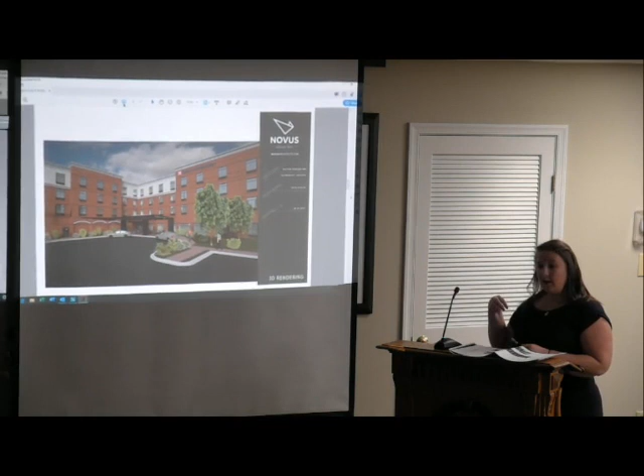Do you have any more of the elevations, or is that the only elevation? Oh, yes, we do have other views. So this would be on the parking side. Lights off as we go through them, sorry. Okay. This elevation here would be from the parking lot side, at the drop-off area, and the vestibule here. Again, the goal is to make that as attractive as the outside street-facing elevations.

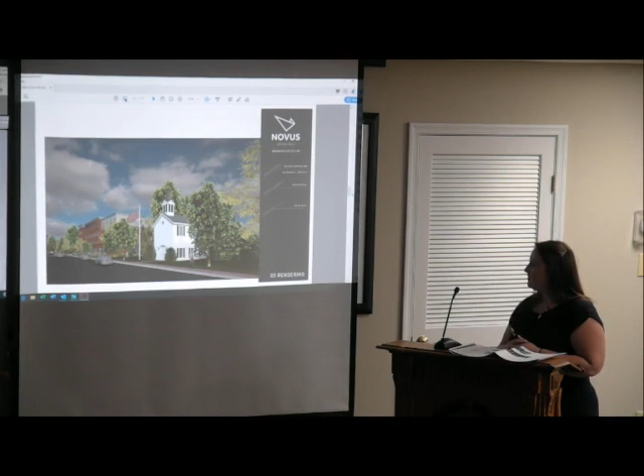This is a view just looking down Washington, with, of course, the museum front and center. And this is highlighting some of the detailing with the soldier coursing here, and then also some of the art window headers. Is the cornice masonry here, or is it?

It's not. We can do either a formed GFRC, formed concrete, or we can do an EIFS material, which I know is not necessarily approved in the ordinance. However, from a distance, it would be colored and detailed to look and read as a true formed concrete cornice.

What about the window, I'm trying to think of the word, it just left me. What's that? Thank you. Are they black? They are currently black. Okay. It just looks a little different than the other blacks, but I'm sure it's just the mock-up. Yeah, I think it's just a material. Sometimes things don't transfer well. And that's pulling in this street front corner and making the whole building really read as cohesive, pulling it all together.

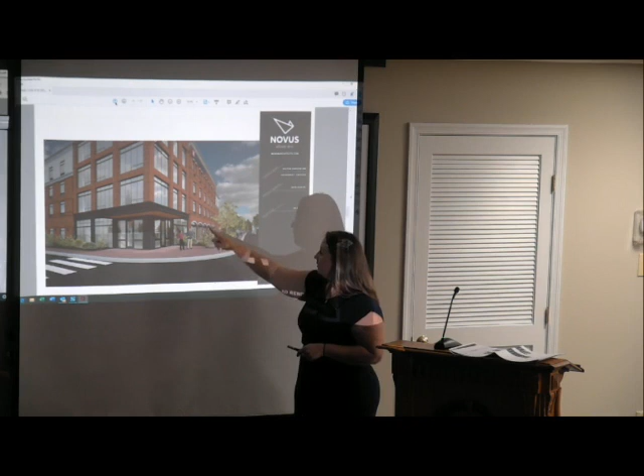And also, I don't see any lighting in the drawings. We do have lighting incorporated, particularly down at the first floor level. This area out here is where our outdoor patio would be for the dining area, and we do have lighting located on each of those. And that's the corner of Jefferson and Washington? Yep, so that would be facing this elevation. And we would repeat that down the side of the building as well.

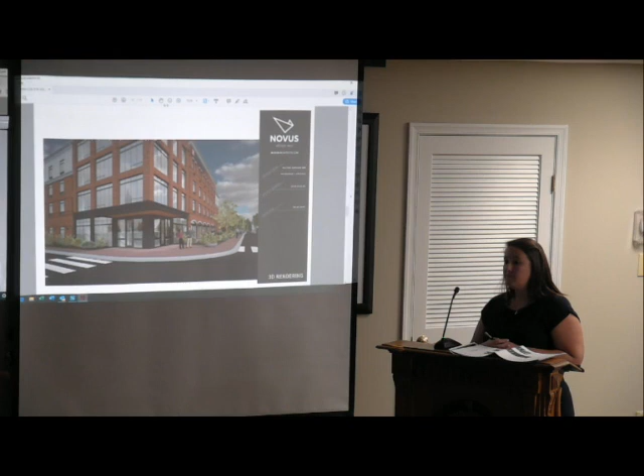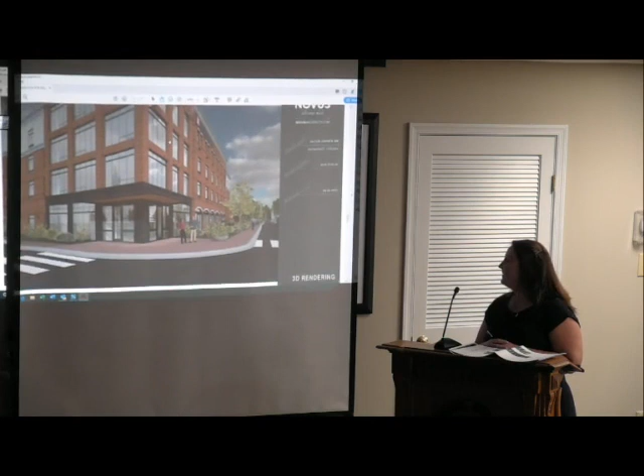They're hard to see. Do you happen to have the specs on the fixtures at all? I do not. We aren't quite there yet, but we'd be happy to submit those. You can see them faintly. I see them, but they kind of fade to the background. Yeah, and it's difficult to see any detail that you might have. Is the brick pretty much flush all around, or do you have any type of? No, it's recessed in and out. So if we go back.

This view is detailing or highlighting some of that, and everywhere there is a soldier course or row up, we either project in or out, so there is some relief in the building. Those are air vents for the HVAC units, and those louvers would be colored to match the window frames.

What is the relief on this panel, between the two bays? You have this bay with the brick, and then the next bay over with the masonry. What's the relief, about 3 or 4 feet? It is, yep. It's about the difference between a king room and a queen room, so I believe it's about 3.5 feet.

You can see that a little more clearly if you look at the plan view, where there's sort of the ins and outs of the building. Everywhere the building projects in or out, there's a slight change in how we address that, changing up the detailing so it almost reads, as you walk down the sidewalk or drive by, that you would perceive them as separate buildings, treated slightly different from one to another. That's also carried through with the height of the parapets along the elevations—it is not one consistent height throughout.

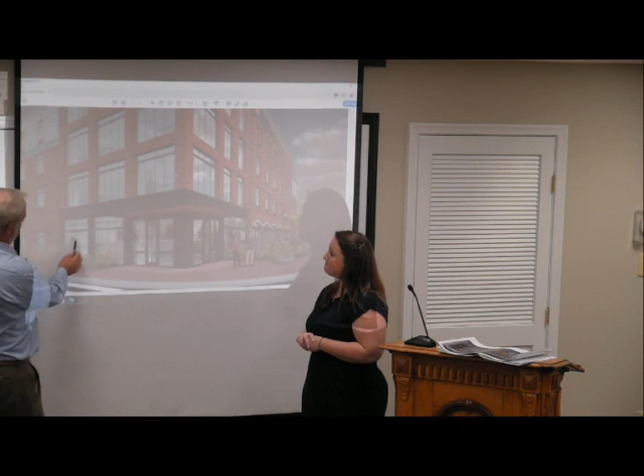Should I use my official voice? This is the divided light up top. This would have the transoms up here. And these are windows that open? There is a change in floor to floor height between the two, and so this line - this height here is the same on all floors. And where we have a little bit of...

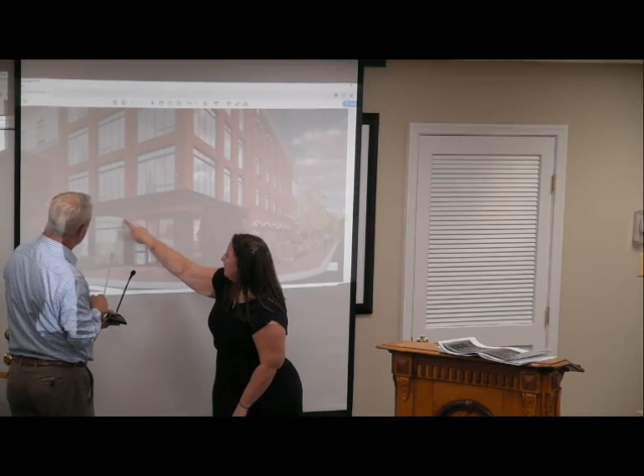So the graphic showed that there's being held with some sort of structural element, a cable structure. That cable will be in here as well, and that's only going to be - the canopy ends here. That's similar to other things we've done.

What else do we have here? Do we have any recommendations on the Washington Street facade?

Window-wise, the cornice detail on the corner up at the top - is that just a round medallion, or what is that? It is, but we are flexible on that. On another elevation, up on the corner, at the top, either the parapet or the cornice has those round medallions. That was a detail just to dress up the corner where we otherwise just had a flat panel, bringing in some of the historical relevance with the medallion aspect. Also reading off of the museum, there's the round venting there, pulling that through to carry on. I think it's a nice detail.

It's just hard to see in these - if you sent us the full-size drawing, we'd crash our computers. But you bring up a good point - what elements were you carrying over from the museum? So you have the round vents, it was medallion, sort of pulling in the circular medallion aspect of it.

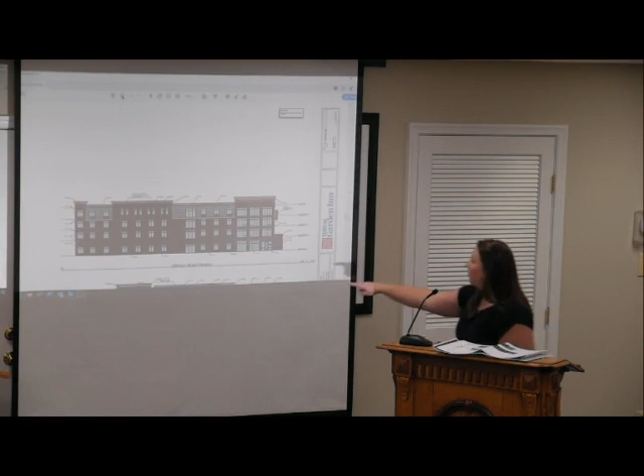No, I think he's saying it's really hard to read because of the coloring on this one, just the black and flat detail. If you go to the elevation you can see it, next to this bottom corner down here. Probably still hard to read at this scale. There, you can read it.

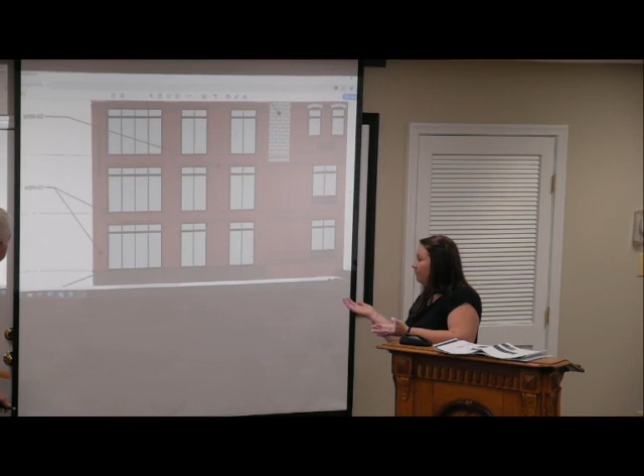So it's essentially an I-beam or C-channel profile where the flanges would extend out at the corners here and here. Is there any kind of detailing we could get on there? Down the street there are some awnings that have an additional, almost decorative element, like an I-beam building.

We actually approved an I-beam setup like this, but that was for the property in the industrial area. This brings up more of an industrial approach as opposed to something else, but we'd be happy to incorporate that, if we could incorporate something a little bit, not too much detail, but just something.

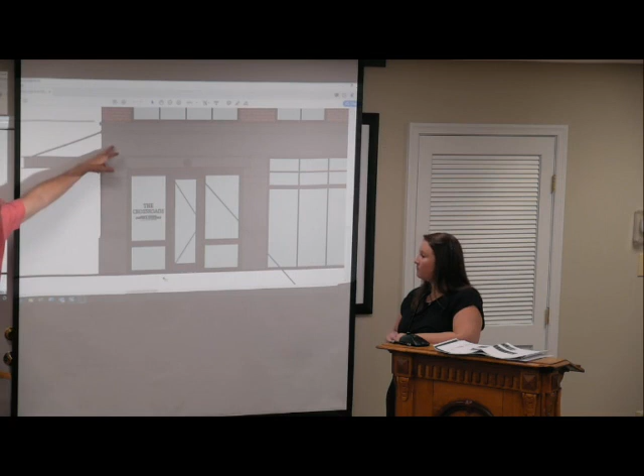The band above it, is that metal as well, or is it painted the darker color? That would be painted. You can see there's also detail in here. That's the stuff I was missing. You can see how you're breaking up the lengths, you even have a cap here to cap in the relief.

Wanting to look at some of the awning details, is that something, or more of a decorative detail she recommended that's something she can work on? It sounds like you also want the columns there, particularly the column on the corner.

What about the awning over the check-in, the portico? So there's a canopy that extends out from the vestibule underneath the drop-off, and we would do that consistent with this one. So the styling of those two would match.

The actual drop-off canopy would probably be a little bit different in nature, just because of height, but we would absolutely tie those in. I'm assuming there'll be a little bit more mass on the portico and back, so it wouldn't be cantilevered, it would probably be a post holding it. So what cars can pass under it, or what?

We'll have a canopy that extends out of the vestibule, and then underneath that will extend underneath the porte-cochere drop-off zone. So that will extend out, consistent with this, being a 4, 5, 6 foot extension before the overhang of the porte-cochere overlaps.

No one's mentioning the Crossroads. Good branding, page 22. I saw it. Okay, you're being very patient with our questions.

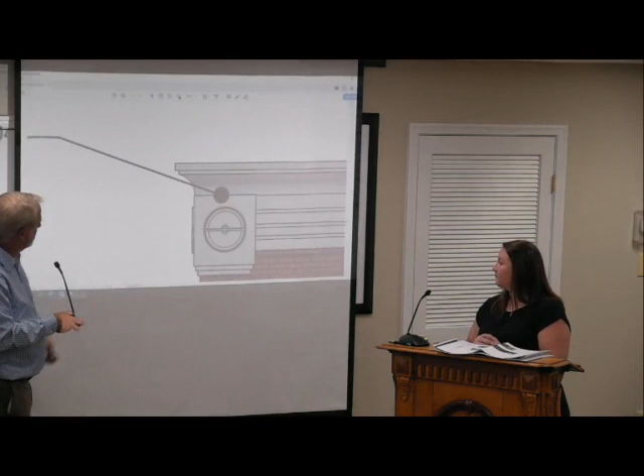Do we have any recommendations on that? That's an interesting kind of detail there. I think maybe I would do without the horizontal. I was just about to say that, it's a challenge in 3D modeling. I would eliminate the horizontal.

So this is part of it too. You have the relief, so you kind of have a raised column, and then you set it back a little bit, and then have a different color brick soldier course. I like it. And this is kind of the cap.

What was the relief between the two buildings right here, was that just to break it up? Yes, it's a small inset, I think it's less than 2 feet, just to break up the corner piece from the next component.

Is that the same plane? Which material is it? Yes, sandstone, so at the top there you're seeing consistent with this. That's what I thought. Is that recessed any, or is that the same plane? No, it's recessed. Okay, so a good break up there.

And okay, now I'm gonna completely go off. The doors, not the doors that people come in and out of, but I don't know if it's like emergency exits, whatever, the solid doors. Okay. Are they just gonna be... Those would be painted; ideally, we would paint them to match paint one, which would be the iron ore, the dark color.

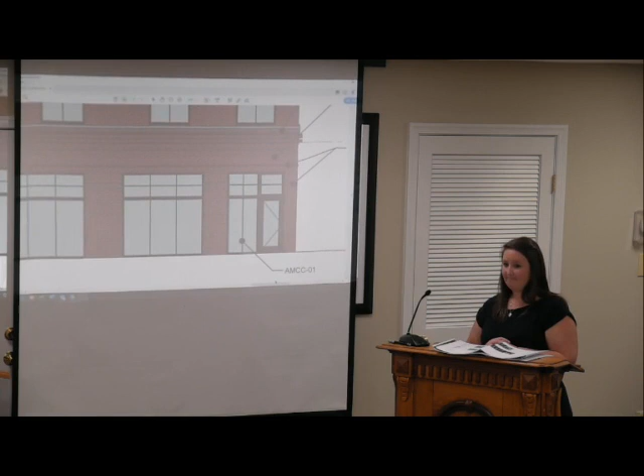Right. Was that the one element you're talking about? What, the doors? The door, okay. Gotcha. I was thinking about something else. And it was like utility doors, not the doors that people are gonna use every day, but more that the staff would be using. And then this is the 1-story extension that you're showing there?

Mm-hmm. Okay. And you were looking at having lights, I guess, between each of those columns on the street? So, they aren't showing here, but they are intended to be between... poor Emily, should get you a mouse. They are intended to go between each of these large windows.

Okay. So may I take some summary, I guess, on the Washington Street facade? Some interest in looking at the lighting fixtures, some more detail on the medallions, on the cornice on the corner. More awning details, I guess more of the decorative nature of the awning. And then we had some recommendations on keeping the columns. Okay. I don't really have anything else.

And I think here you can see more of the detail in the mullion, the breaking up of the mullion. Mm-hmm. The change in height, focusing on the corner, on the end where you have the block on the 4th story, that sets back a little bit as well, doesn't it? Yep, there's a setback here. Those are the queen rooms and the king rooms. Trying to make a joke.

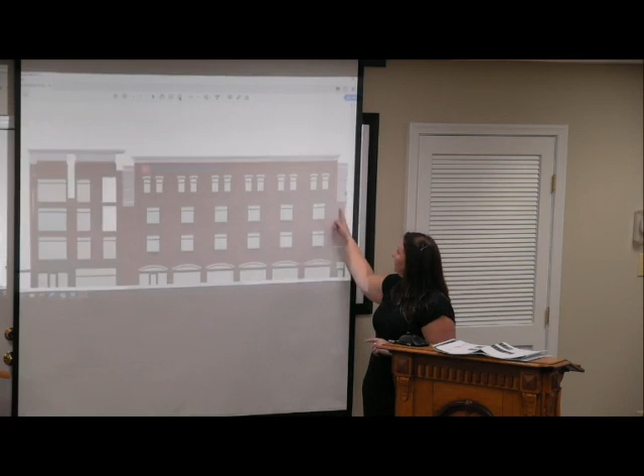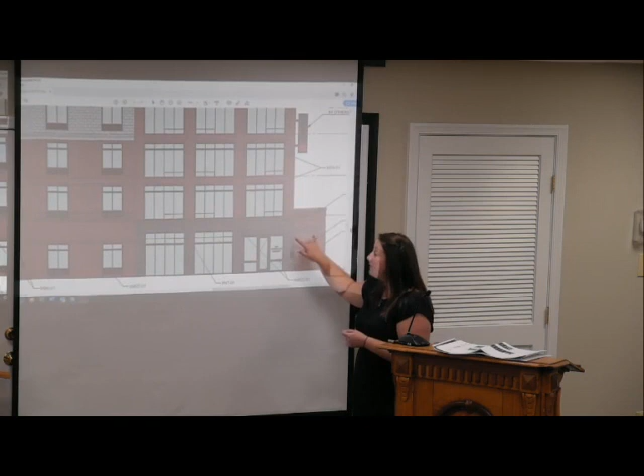Okay, can we switch to the Jefferson, Mr. Chairman? This Jefferson facade. Okay, so the awning would wrap around the corner, and where would that end? That stops here. You're going the wrong way. The elevation. It extends from here, and that projects out, again, I think it's 5 or 6 feet. And then it extends back to the end of the storefront.

This is all open to the bar and public space, bar and restaurant inside. And then these first 2 windows along here are back of house areas, and so those will all have window treatments. Okay, can you scan that a little? Yeah, that's what I was gonna say.

Stop right there. On your site plan, you show this as a vestibule that comes out? We did have a vestibule here. We've since removed it since we did turn in the site plan. And that was removed due to security and visibility from the front desk. Gotcha. So with the main entrance being really on the corner, it's very visible for the staff. I get that.

And then that opens up to, this is the elevator lobby, and then this is a solid wall because of the elevator. Okay, I just had a question about having those windows all the way up. If you look at the massing of the whole building, those window types seem out of place. Sure. It's not going to have a door there at the bottom though? No, we will not have a door there. I see what you're saying. Happy to scale them down.

Emily, could you zoom out just a little bit? The reason we did do them large is just because of guest experience, when you're standing at the elevator waiting. Oh, and light. Yeah, it's light. It's nice to kind of look out and see, but we'd be happy to look at that.

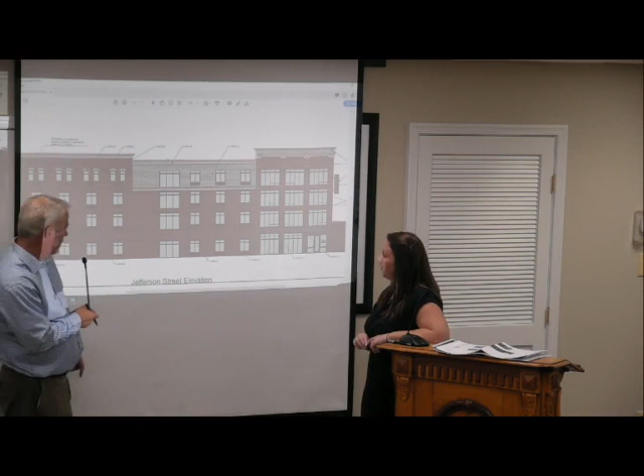Okay. So in here, we're just thinking not so much eliminating it, but just bringing it maybe up to match. So you have that light, and I know that's the HVAC vent too, right? Yep. Okay. And on second thought, the vents on this floor right here would go away. They would. Okay. Something that just kind of brings some consistency across. And then I guess we're talking about doing the arch here.

Doing that up above. What do you guys think? It's just kind of a big blank space there. Yeah, this, along with the windows, makes sense because it's its own, I call it panel. This is kind of the next panel that comes out. So would you then look at it and say, well, you have the large windows on the right, and everything else is now small? I'm just saying that the Washington Street side, the view is so interesting, there's so much depth to it.

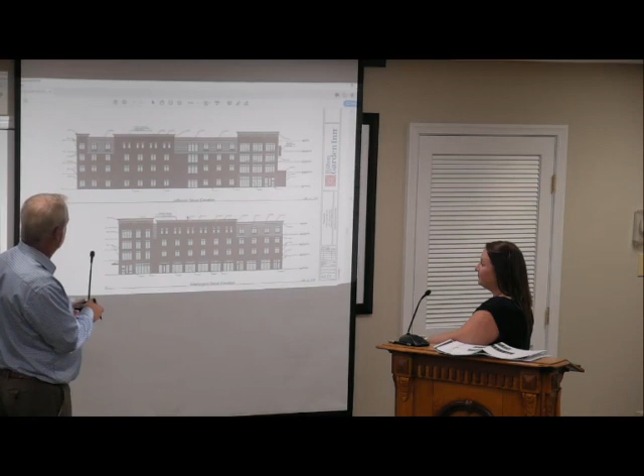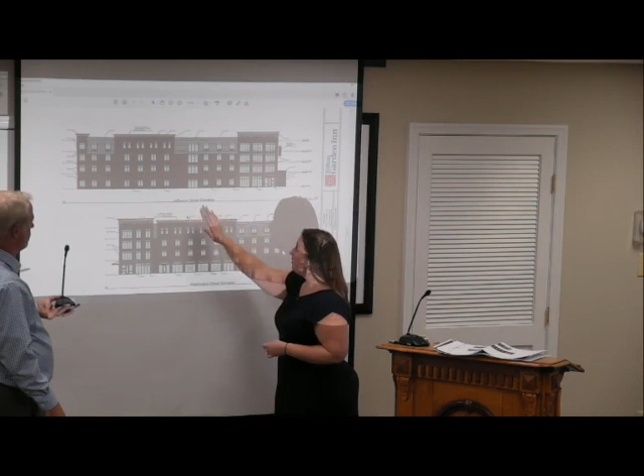Do you maybe make part of the arch on the first floor of Washington Street on the Jefferson side, and that gives you visual interest? I mean, doing something like this over here? Yeah, correct. That's what I thought we were talking about. But I would repeat that. Oh, I see what you're saying. And despite the fact that they wouldn't all be windows, this one and these three center ones would be windows. We would still have an arch here, but they would be solid brick. Oh, okay, I see what you're saying.

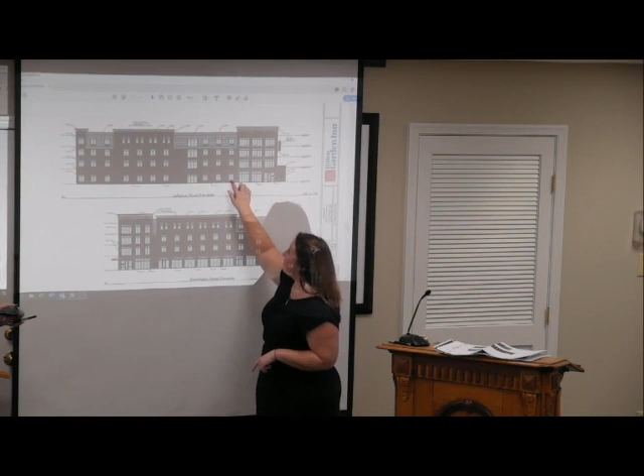Show me, I don't think I'm understanding. So we would do this feature with the arches on the three center ones. And then the outside ones, where this is actually an electrical room also, we would do that as an arch, but it would be a solid brick infill. I think that would add a little bit nicer detail to that side, since it's also a gateway into the town.

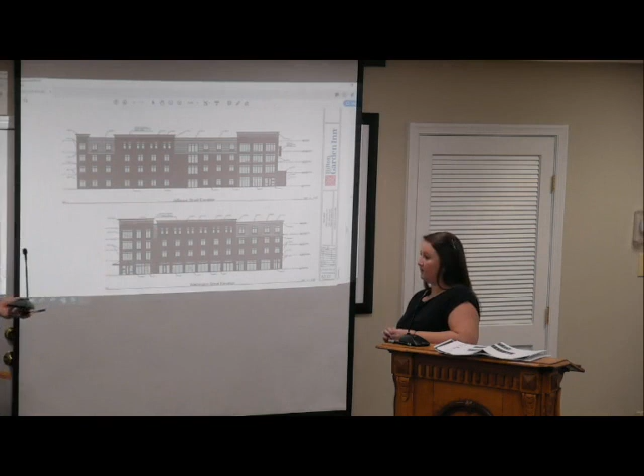Now, what I do appreciate is that this is four-sided architecture, so if you were to look at it from the Fayette Street side, it matches this same, so I don't think we would necessarily have to mimic this on the other side where the entrance is. No, I get that. I'm just worried because that is another entryway into our town, so that's almost like another front side of the building. I think that would be a nice enhancement. Yeah. And then up on top, does that window seem out of place in the concrete?

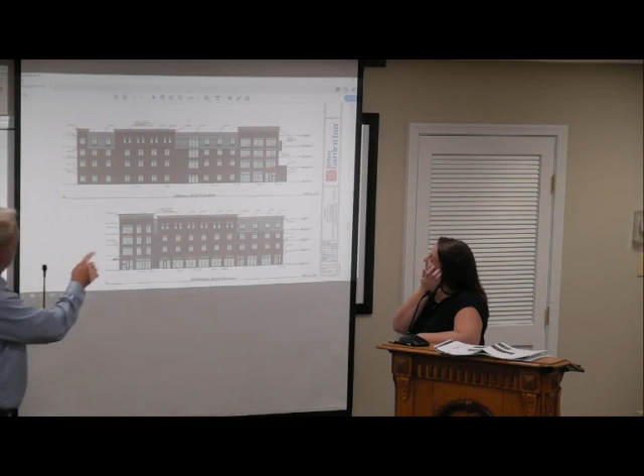Yes, that kind of sets it off too. So I think maybe with the arches and these windows, this one seems kind of out of... you're taking this very well, not trying to insult your work. No, no, no. This is a great job. You guys have done some great work.

Thank you. It almost seems like you're going to walk out. But that's the whole elevator bank, is that what you're saying? Yeah, so I think when people are still standing there... Maybe it's 3 windows, but maybe you just raise it up a little bit so it's a little bit more in the dimensions of this.

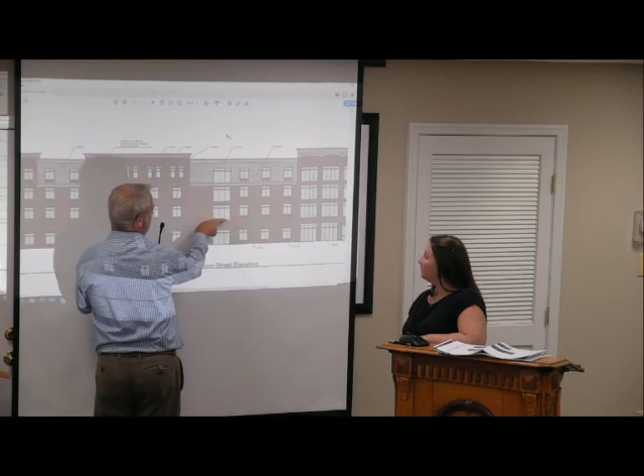I fully agree that it needs to be as much light as possible. That natural light's great, but maybe closer to matching the dimensions of that, if that's possible. Still keep them wide, but shorten them up, be proportional to them. Exactly. But those were going floor to ceiling is basically what you were saying. Yeah. So, cool. I think you guys did a great job. I'm very impressed.

So on this one, Jefferson Street, you're dropping from Washington Street down to Payne Lane. The slope of the property is what you're speaking of? Exactly. So I think you're showing this a little bit here, but what do you think about doing like a water table to highlight that change in elevation? Like a low water table along the bottom?

Our building won't change elevation, and we haven't gotten through the grading of the building yet. That is something we were talking about yesterday: are there any major concerns, any major drop-off areas or areas for ramping? As of right now, we won't have any grade change greater than 6 inches within 5 to 10 feet of the building. I can't speak to how the current conditions will be resolved with grading, but right now there is no physical shifting of the building elevation.

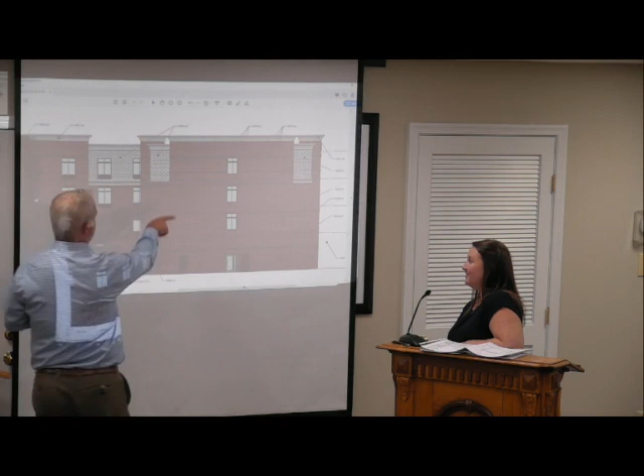So with that changing, this is now a large wall coming up Jefferson Street. It is. Would you have any ideas on how to maybe break it up a little bit more? I mean, it's going to be a lot to bring it around. So this would bring it down, and this would just be the brick. Yeah, I think we're gonna rely on landscaping for this elevation, and you have the soldiering and some other things, primarily because of how these spaces are being used on the interior.

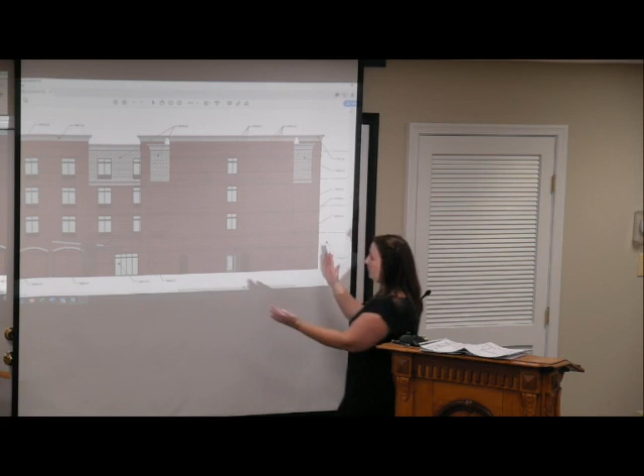We are carrying all of the brick detail around the building, so despite the fact that it's a relatively windowless facade, it is going to be detailed. And I will also point out that even though you're seeing a lot of brick right now, this is really the end elevation that you're seeing in the street. And you'll see some of the depth change, because it's just so flat right now in the flat elevation. It really is a lot of brick.

And so I think breaking up those materials on the top, and then also just understanding that it's really just a smaller section that's facing the street. Okay, so if you move over, go to the left, Emily. These archways here, I can't see that, are they delivery? No? Nope, so that's what I was suggesting on the Jefferson Street side, where they would be a solid fill.

So again, this is an area, this is the kitchen space. Gotcha, okay. This is across the inset parking area. So where you're seeing this is really up against the drop-off zone. And so it's just, how do you use a utility wall and make it a little bit more interesting on the exterior? And so the addition of the detailing here plus landscaping to sort of frame that space and make it just a little bit more interesting when it otherwise has no openings.

Okay. Awning over the rear door, would that do anything, any relief? We will have awnings on the exterior doors. So it'll be the same, whatever detail you come up with for that front corner, will match them going around the edge of the building? On the two stairwells, we will have. Okay, can you show those as well? Sure. That'll be nice, that'll break that up as well. There's a little awning over the entrance. Awning over exits. Now, that's the canopy. Yes.

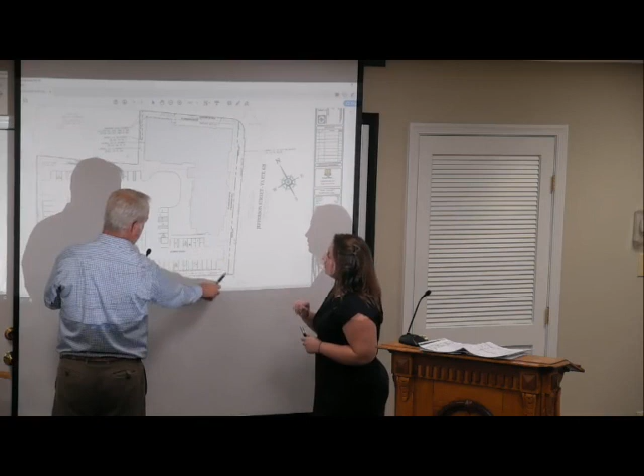Could you go to the site plan real quick, before we go back? So the vestibule went away. Yes. This is what we were just talking about with the relief, and that's another inset door. Oh, it is an inset door, but it's gonna have an awning out here, okay. Right, because we'll have an inset door here that will exit from the corridor. And then there's also a door exit from the stair, and there's a utility door. So the utility door we will not cover, but we will add a cover canopy here. Cool. And then you're gonna have the landscaping here and here that'll mask that. What were these right here? Planters, okay. This is flowers.

The access is over here? So the main entrance is right. Yes, but I mean from the street, access from driving your car. Oh, sorry. Yeah, it'll be over here off Fayette. And it's one entrance in and out. We did meet with the fire marshal yesterday. He approved that. Total sidebar, but are you gonna need a dumpster pad? Yes. Dumpster pad will be here. Materials will be consistent with the building, so it will be a brick enclosure. Detailing will be consistent, and it will also be landscaped all the way around.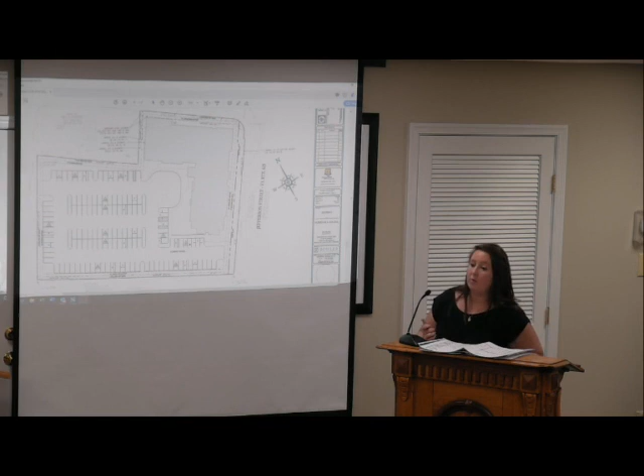Do you wanna throw that in now, just to get it approved, or we can do it later? Sure. I don't have any images of it, but yes. With some of the amendments, that's typically how we've handled it before, just generally matching the materials of the building. How about the doors to it? We usually discuss those too. There's some recommendations on doors. So typically we would do an aluminum door. We'll do it black to match the paint 01. So it would match the awnings and it would all be tied together. Two large doors. So can you zoom into the Payne Lane side again, please?

So those rear doors would have the awnings as well. And that's the back of the conference space? This one is an exit stair. It has a pass through to the meeting room for exiting. This is the kitchen delivery door. I probably would not put an awning or canopy on that door. And you're gonna have landscaping there. Correct. Okay. All right, anything else on Payne Lane? My big question was wrapping, so that was cool.

I guess my one last thing, I'm guessing this is the Washington Street side. No, this is Fayette. So the museum's going to block part of it. Go to the Washington Street side, please.